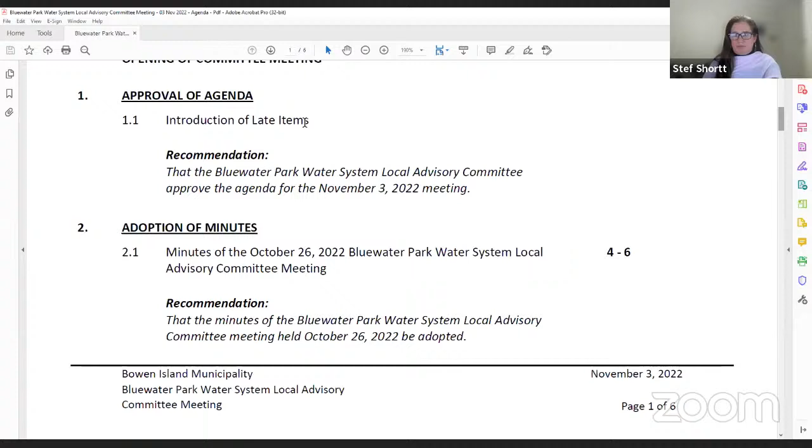So just want to thank everyone that's participated so far. The journey is not ending with tonight, it's just beginning on next steps as well too. So thank you everyone for being part of tonight. So first point, approval of agenda. You did touch on introduction of late items. Stef, anything in regard to that? I don't have specific late items. I just suspect things will be a bit more free flow than indicated on this agenda.

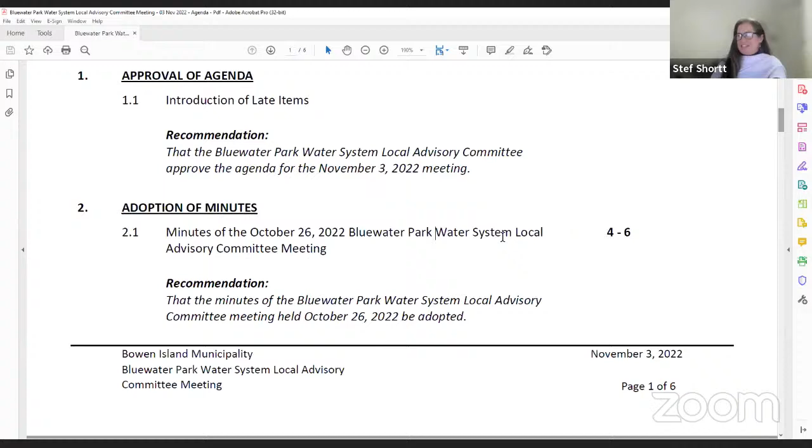So I think at this point with the public comments, we'll switch it up a little bit. The LAC has presented a whole bunch of questions back to municipal staff with a lot of answers, so we're going to be reviewing those. We'll let Patrick make some comments here in the next little bit, and then we'll get into the questions we brought forward with answers, and then we can accentuate those with any further questions, because I'm presuming there'll be questions already answered that we'll review with you that may not need to be discussed a second time.

So we'll switch this up a little bit. So business arising, the next part, 4.1 business arising from the minutes. We'll hand this over to Patrick to discuss more about the water system replacement improvement plan, next steps. Patrick?

So would you like me to go through the questions that the LAC raised? We could do that, but maybe some of the questions would be the driver to clarify a little bit more in regard to some of the proposals, as the latter part of phase one, water main replacement sections that are high risk. Wouldn't mind just reviewing that a bit more on some of the sections of the piping, just as a reminder for all of us. I think that would be beneficial for any of the participants that are part of this. But we could utilize the questions LAC members posed, which you did a good job of providing answers back to, as the driver for the next 20 to 40 minutes. Let's use that to combine, and we can pull up information from the October 26th presentation as required for reference. How does that sound? Sure, okay.

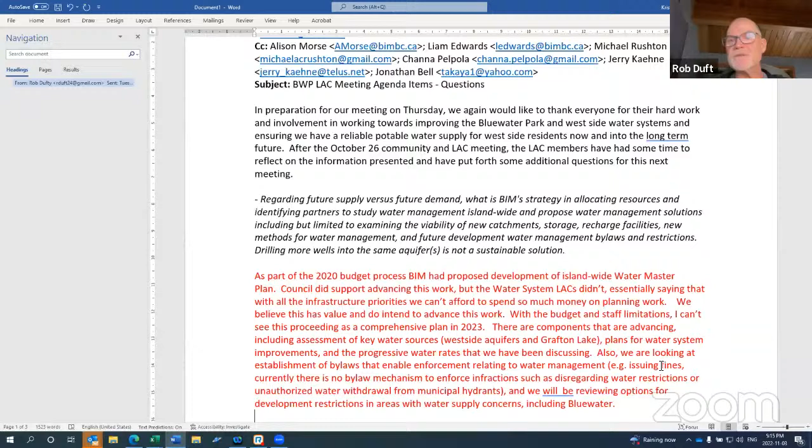So the question was regarding future supply versus future demand. What is BIM's strategy in allocating resources and identifying partners to study water management island-wide and proposed water management solutions, including but not limited to examining the viability of new catchment, storage, recharge facilities, new methods of water management, and future development of water management bylaws and restrictions.

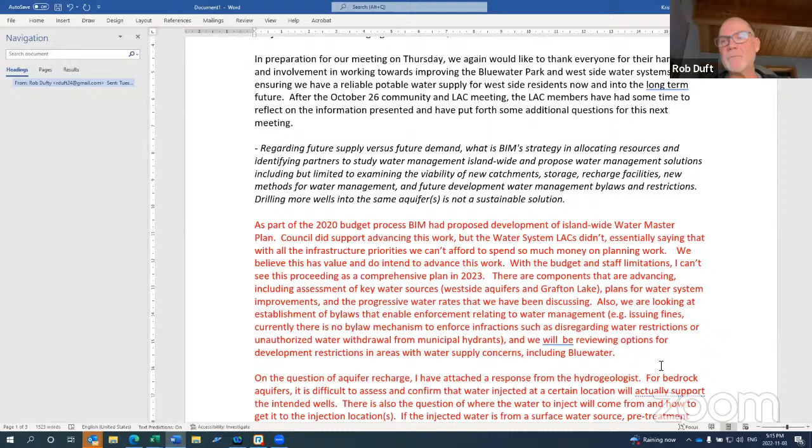In our mind, drilling more wells into the same aquifers is not a sustainable solution. We need to have a multi-pronged approach. So Patrick, you did a great job answering some questions, and there's some further clarifications.

But on the first paragraph, there was something brought up about the 2020 budget process. We all sat in the same room, kind of thing. Alice and I have had some chats about this as well, and that there was an initiative - it's kind of on hold right now - an island-wide water master plan, which was supported by council at the time, but there was concerns by the LACs.

Just a bit of clarification on that - there were some LACs that had some concerns with it because their systems are up to date. They feel they don't need to be involved with anything more. Others have some concerns, think that the plan is good on a go-forward basis, but the concern is how it would be budgeted.

Because there would be aspects of that where one being advantage to private landowners that rely on private wells or private water systems, that the information collected could be advantageous to them. So the question was posed back to the municipality: should this be looked at as more of an island-wide reserves type of way of funding this? And that's kind of the way it's sat.

So yeah, it is meshing with the larger picture. It's just how we get there and how those initiatives from an island-wide point of view are budgeted out into the future. Did you want to say anything more in regard to that right now, Patrick?

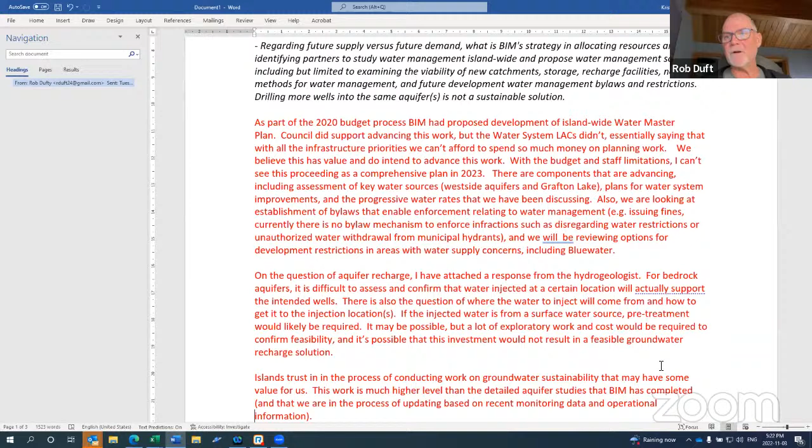Yeah, and those are all very valid and important points, from getting written down and being part of the minutes and being part of what our new mayor and councillor are seeing as the concerns that the Bluewater residents have for the west side aquifers is an important part of it. Channa, do you have anything to add further? Because you brought forward some very important and concerning points in regard to this, just to further expand on the discussions that we've had with Patrick.

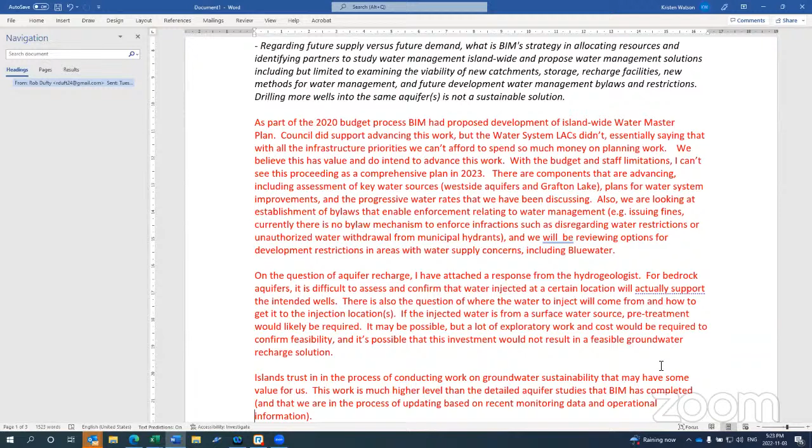No, nothing further. Thank you, Patrick, for all. As I said in the response, it was really well appreciated to see all of the thoughtful responses, because for us it's about helping respond to a whole series of community requests as well, and getting us informed with the most current and relevant information is helpful.

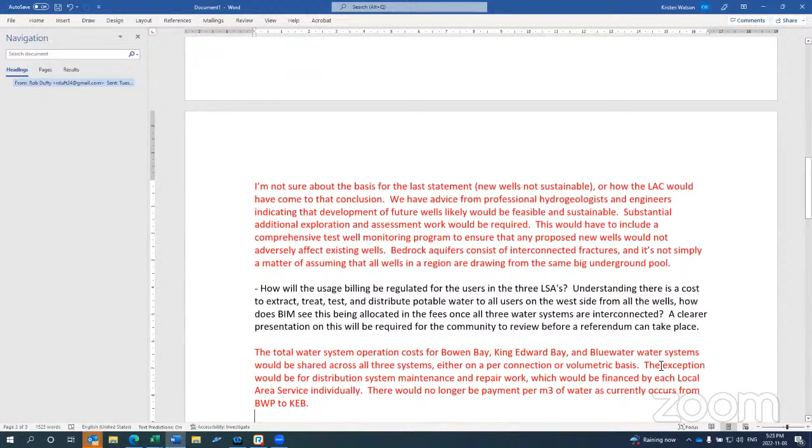I think if I may, what I'm seeing in the responses is an acknowledgement that collaboratively we need to look at some alternatives, and it's great to hear that BIM is eager to consider some of these alternatives and investigate in a pragmatic manner. So that's just my reflections from all of this back and forth, and again, appreciated.

And I echo that, and other LAC members echo that as well, as not wanting to take it off the table, always keeping minds open on what we can do potentially differently as different technologies come up to us in years ahead as we continue down this journey of existing infrastructure upgrades, and ensuring that the water supply is going to be there not just for us over the next 10 or 15 years, but for decades to come for others that buy into and want to live in the West Side community. So yeah, thank you for that, Patrick.

And I guess I would also add that monitoring the aquifer is something that's going to be ongoing, right? We've looked at it. There was a comprehensive study in 2020, 2021. We're actually updating that, reviewing the key conclusions from that based on more recent data and operational experience. And that's going to be ongoing.

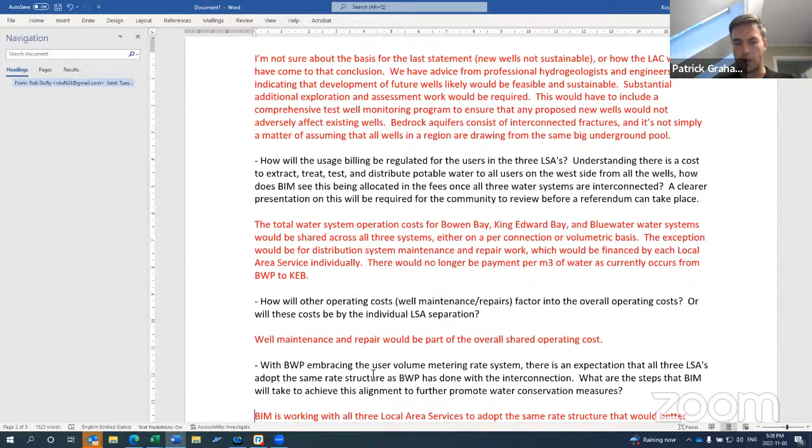If we have all of the King Edward Bay and Bowen Bay wells pumping into the King Edward Bay Reservoir and supplying all of the systems, then it would make sense that those operation costs are shared. Whether it's done on a per connection or volumetric basis is a detail we still have to resolve.

But Patrick, Jonathan, this is what I want to get in writing. So we've been promised — this is basically creating a West Side water system, right? That's what you're doing here. By that statement, you're creating what — so are we going to get that officially in writing? That's what you're doing? Because there's been a conflict here, because Kristen responded about the yearly charge that Bluewater pays for so-and-so costs. We're not going to be doing that anymore.

So Kristen, are you shaking your head — no, we're not going to be doing that anymore, or no, I'm wrong about saying that? No, you're not wrong. We're not going to be doing that anymore. We're going to be combining the operating costs to produce, distribute, and treat the water, and share them on a pro rata basis onto each of the systems.

Patrick mentioned there's a couple of ways we could do that. We haven't really decided on a way forward with that, but an easy way to do it is based on the number of connections per system — they get that percentage share of the total cost — or we meter the water consumed within each system.

And why doesn't the monthly fees go to that? Or not the monthly fees, the water fees that we just generally pay. We're paying $1,085 or whatever. Yeah, it is, but next year...

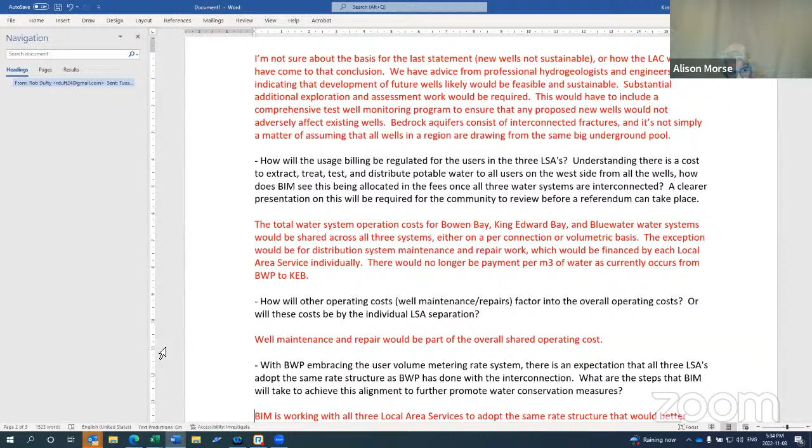Kristen, but just to clarify, the costs that will be allocated amongst all three systems will not include any repairs or maintenance to the actual water lines that are in the ground. The water lines, given the difference in age and condition, those costs will be tracked and maintained separately by the three water systems.

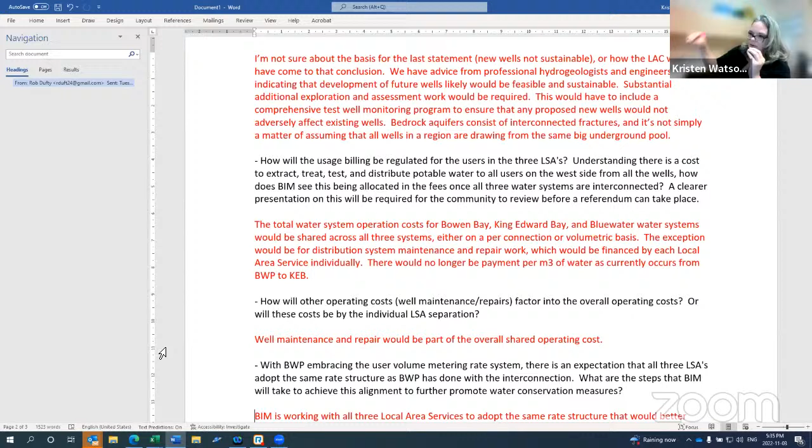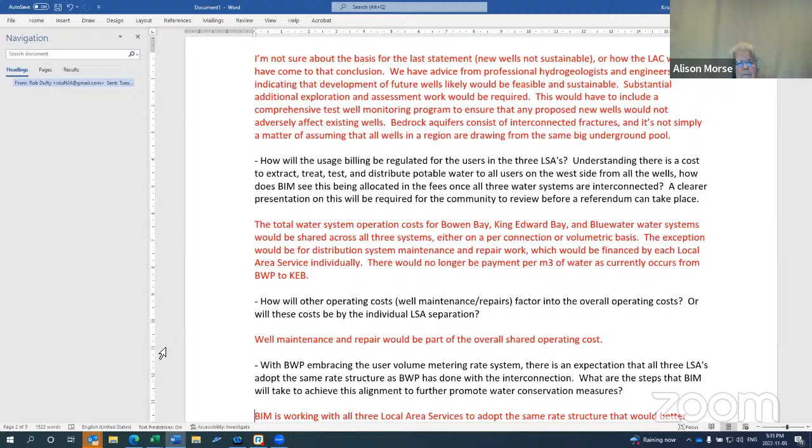And one more thing, sorry Alison - also water conservancy, is that the right word? And restrictions apply across the board? Because this year we had Bluewater at... There's a Stage 4 question coming up on that, Jonathan. Maybe you can hold it till that comes up. I can hold it, Alison. I'll hold it. Okay.

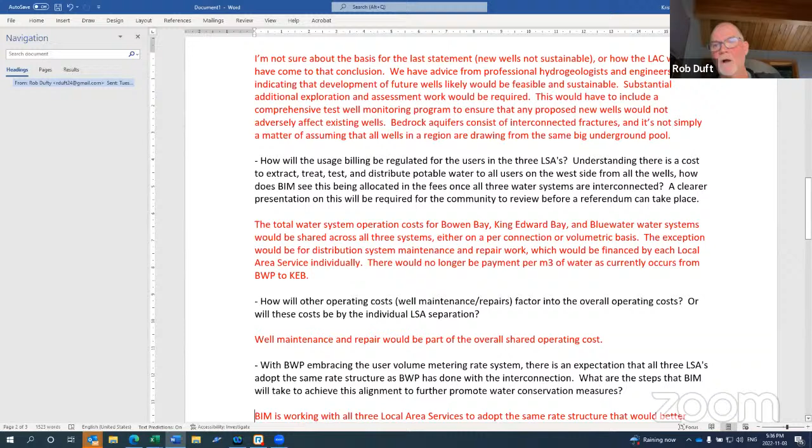And I guess the second question about well maintenance and repairs, you pretty much have answered, Patrick and Kristen - in regard, if a well in one of the three, or a pump in one of the many wells throughout the three LSAs does fail and need to be repaired, those are classified as operating costs, ongoing maintenance costs. That would be part of the operational cost that would then be divided across all three systems or LSAs.

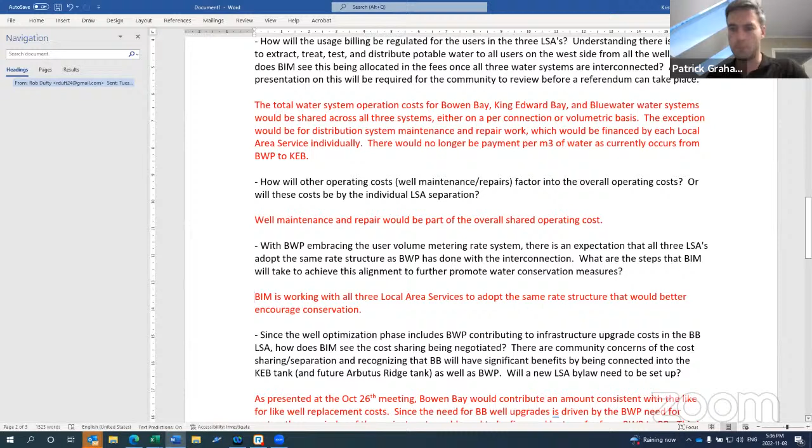I also just wanted to clarify something - when Kristen was providing her explanation, she gave the example of a reservoir in Bluewater being financed by all the systems. I don't think that would be the case. If we're building a reservoir to provide fire protection for the Bluewater service area, the King Edward Bay service area wouldn't be paying for that reservoir - they already have a reservoir. So I just wanted to clarify that wasn't probably the best example.

Well, but fair enough, Patrick. But once we do get to the level of adding additional reservoir coverage, volume coverage that is going to be interconnected - for instance, Bowen Bay's water tankage is quite low in volume, so they'd be gaining benefits from the combined system of the existing King Edward Bay tank and any new Bluewater tank that would be sized appropriately to accommodate the whole system, as well as the future Arbutus Ridge tank.

Understanding also that the Bluewater tank, any kind of upgrades in the future on that, increasing size, would also provide the additional fire flows for the community at this end of the line too. So those are definitely going to be important questions to answer with the community as well, those kind of large infrastructure upgrades.

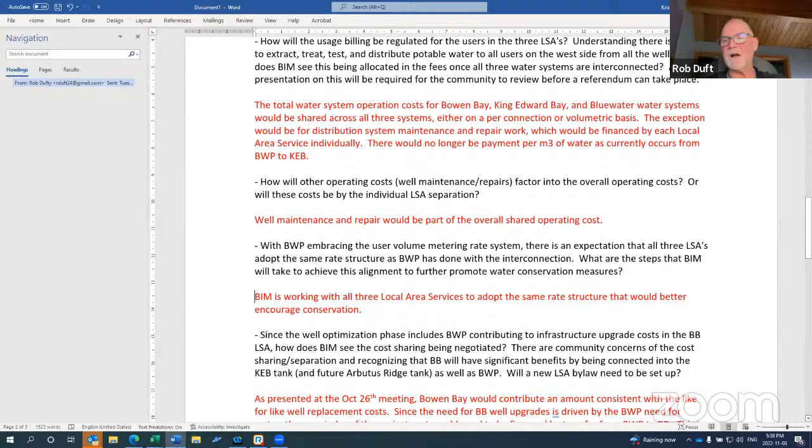Okay, next question. It's around the volume metering rate system that LAC, Bluewater Park LAC, had voted on back in July to adopt, to promote water conservation and make it more of a fair sharing of water usage type of system. And I guess the question is, will the other LSAs be looking at the same thing so that we'd have alignment? In Bluewater's mind, that alignment definitely is an important aspect of even water conservation promotion.

And it's the same rate structure that's being proposed for all three systems. But you're not quite there yet, from what I understand. So that's a work in progress. We haven't had our meeting with Bowen Bay yet, but we had our meeting with King Edward Bay, and they endorsed the same plan. Oh, good news. Good to hear. So 2 out of the 3, we're getting there.

Okay, next question, since well optimization phase includes Bluewater contributing to infrastructure upgrades and costs in the Bowen Bay LSA, how does BIM see the cost sharing being negotiated? This is more of a question around bylaws for LSAs, funding from one to the other. And of course we've had discussions in the past about how the sharing separation, also recognizing Bowen Bay will have significant benefits eventually. Not to say that we're wanting to meddle in Bowen Bay's finances of when they want to make the decision to upgrade their system to different levels.

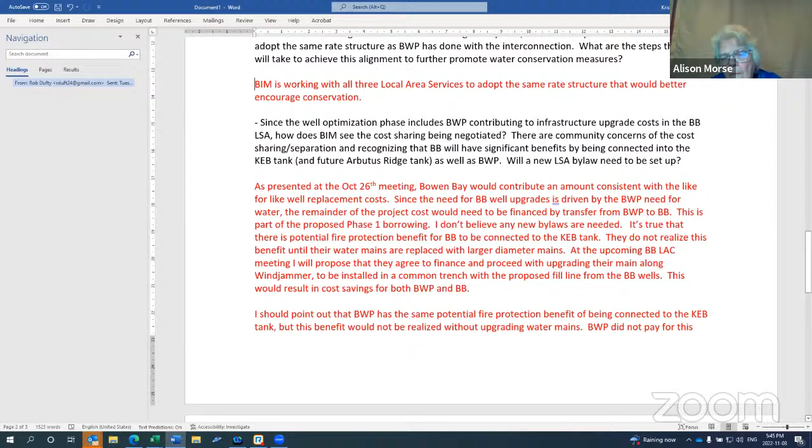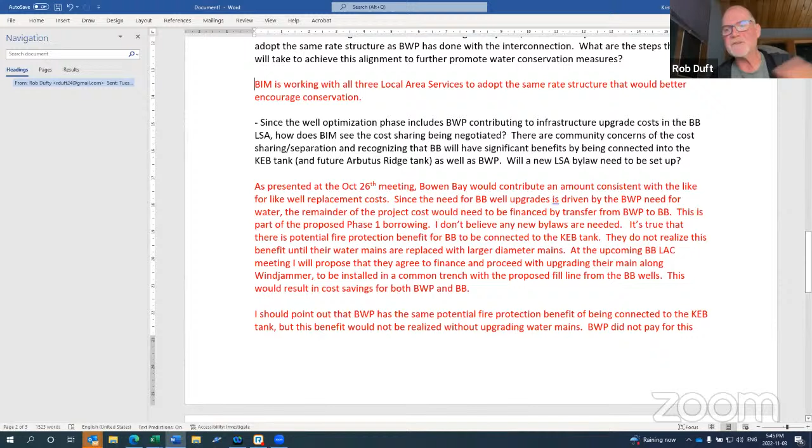The cost of putting that line in isn't in Patrick's cost for Bluewater. That's a phase down the road, even with Bowen Bay facing the decision of when they want to upgrade the rest of the lines. Then they'll have the benefit of the larger volume of King Edward Bay tank to supply the fire flow requirements. So that's a step process down the road, not meant to cloud this first phase of the well optimization. It's just a recognition there's a bigger picture here on the steps we eventually take for future upgrades, sharing the whole system with the interconnectedness. That's where we were trying to go with this statement, so it wasn't getting lost in the grass.

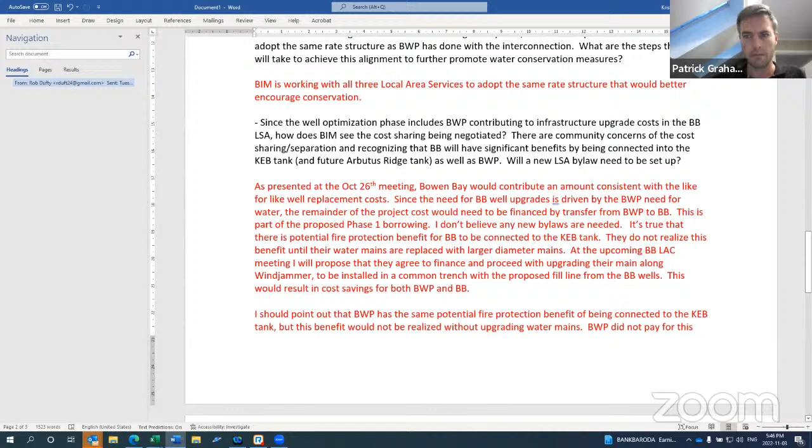Okay, can you scroll down, Kristen? Let's see. Please. Oh yeah, okay.

So I think at the end of all that, we're on the same page, that the proposed financing for the well upgrades, the way it's been proposed, does make sense to this committee. If we're going to get down to arguing about dollars, we're also realizing the direct benefit right now is going to be for Bluewater Park.

Just to put in this point from your email, Patrick, that you sent out the other day, we have zero wells in operation in Bluewater, so we're now at 100% reliance on the water coming out of the King Edward Bay tank. So we need to look at getting that well fixed as part of this well optimization, replacing it with something more optimized to accentuate the whole system. There's no argument with that, at least from myself and other LAC members. We recognize this is an important next step for us to get to a more reliable, potable drinking water system so that we're not hitting these stage 4s.

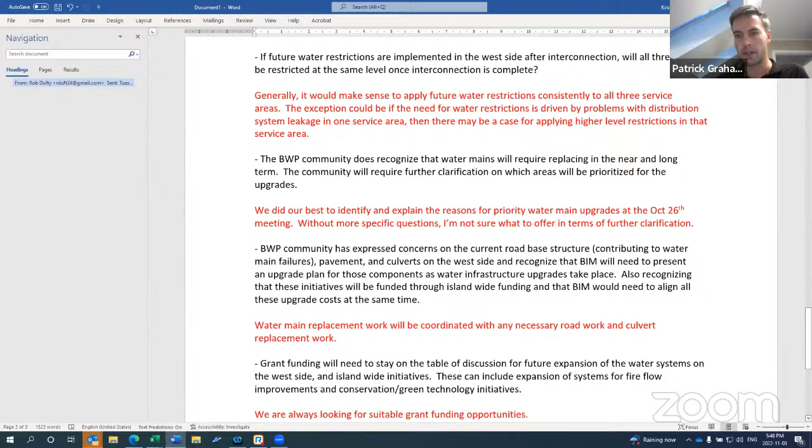I think this is the question you brought up again, Jonathan, about future water restrictions implemented in the west side. Patrick, you did provide an answer on how that would be handled. Generally, it would make sense that if all three service areas are supplied from the same sources, water restrictions would be consistent. I added the caveat that if there's a situation with substantial leakage in one service area causing problems for the others, there might be a case for applying higher level restrictions in that area. Yeah, to me that makes sense.

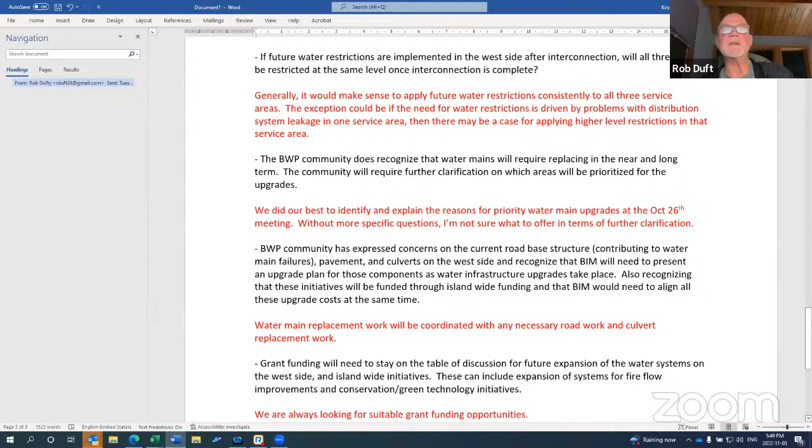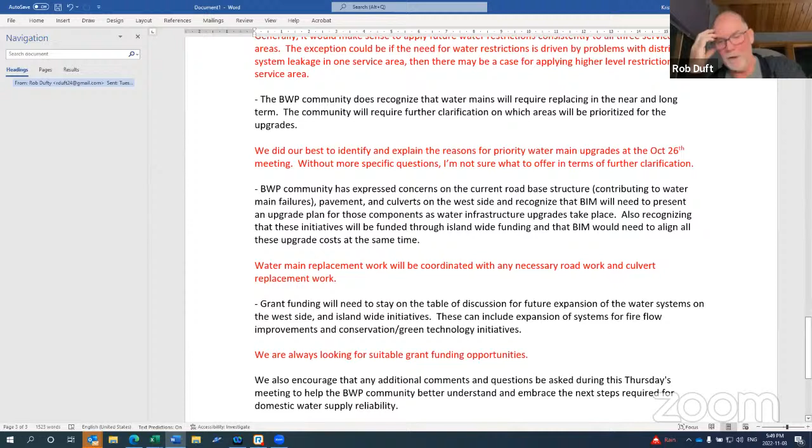Bluewater Park community does recognize the water mains will be required to be replaced in the near and long term. The community will require further clarification on which areas to prioritize. I know you did a presentation at the October 26th meeting, and you zeroed in on a couple of sections, so maybe just remind us and talk about those sections briefly.

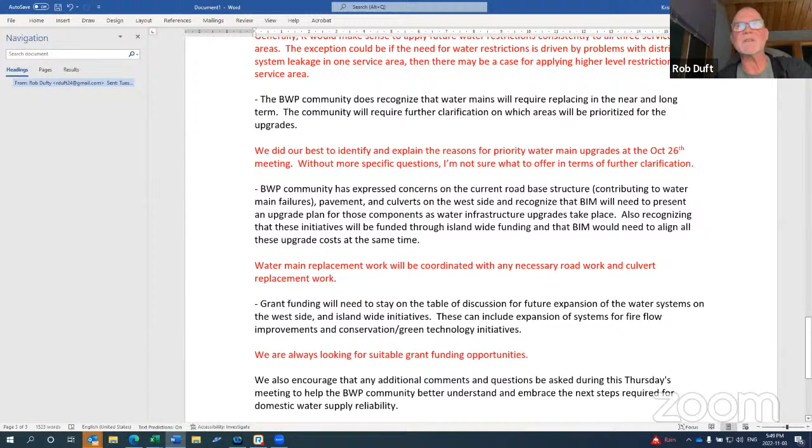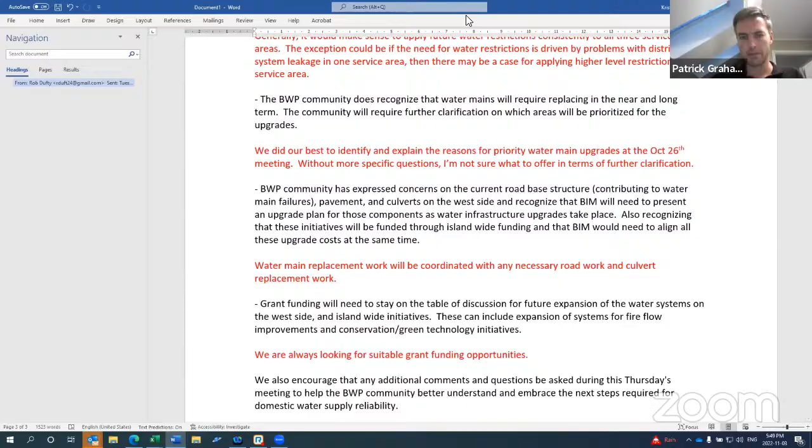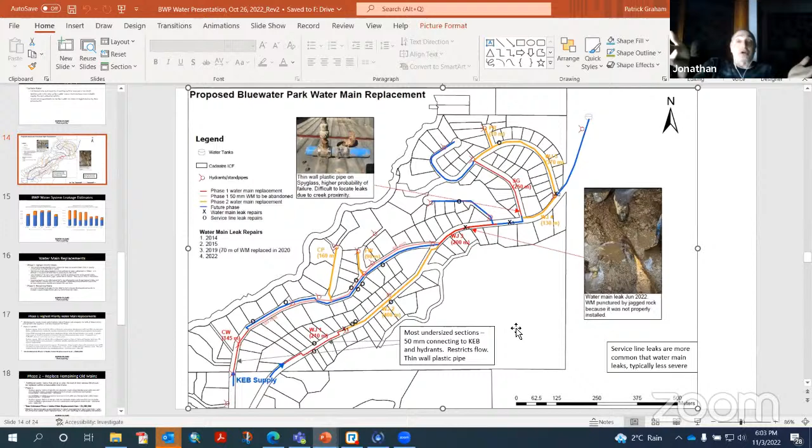There's more than just the stratas involved in the King Edward Bay service area. There's private individual lots that aren't part of the strata as well. I was thinking about the strata itself, like the roadway and everything is private. I just didn't know how that worked.

If it's a water service line on a strata road, then that's essentially strata infrastructure. For it to be municipal infrastructure, it has to be on municipal property, or an easement created for it.

So if there's a leak within any strata property, I'm not picking on King Edward Bay, then they're responsible for fixing it if it's a strata property. I think there are some stratas or private roads within Bluewater that has come up in past discussions with Liam on how those could be handled as well.

I think this Isle View is a strata line. It is, that's where I live. Yeah, so that's why I was asking. I think there's a bit of a connection that goes up Schooner Lane, and then in past minutes over the decades, even Mutiny Lane going up to the water tank, and currently there's no provincial license for that equipment up there too that needs to be looked at.

So yeah, there's still a lot of things that need to be worked through, wrinkles on the remaining part of the system that's going to take some time to solve.

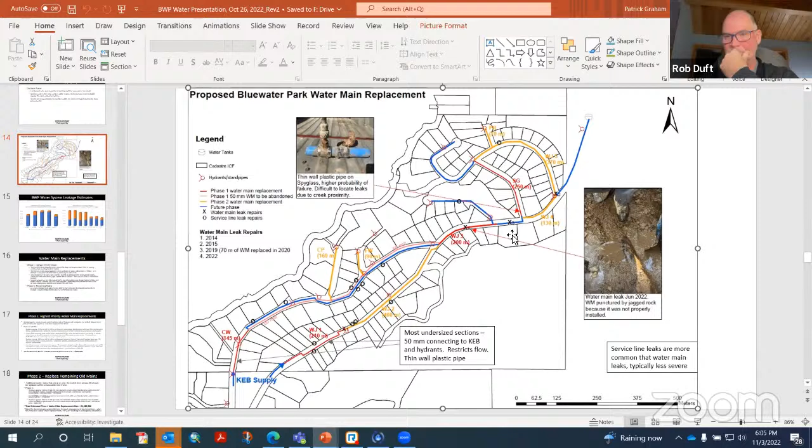Okay, couple of last questions here. Bluewater expressed some concern about current road-based structure and what happens, and I know Liam made a comment about cut and cover. But funding for major paving of roads has got to come from different reserves, and there's not a big pot of money with the municipality to do those kinds of things. But there's an expectation that even Bluewater, being kind of the forgotten community, is finally looked at from a let's make things better out here too.

So that's on there as being recognized as a takeaway in the minutes too, Patrick. Yeah, I don't know about Bluewater being a forgotten community. There's a lot of road on the island. Oh yeah, recognize that. So there's a lot of road per capita in Bowen.

Certainly we would strive to do better than what's happened in the past in terms of integrating infrastructure work, road work, and utility work. Whether it makes sense to redo a whole road versus just repaving the waterline trench portion of the road would depend on the condition of the road.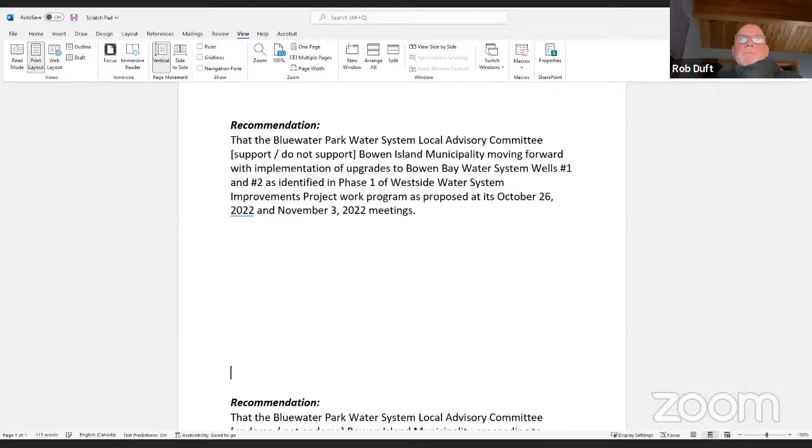Thank you. Now, I think this has to adjust a little bit, Patrick. I was looking at it today, and it's pretty generalized right now, but those are the steps. But you did send out a late item yesterday regarding the Bluewater number 3 well has failed, and you'd like to advance the optimization replacement of that well from phase 2 to phase 1, which is going to change a little bit of the cost structure you're proposing here, as well as some of the wording in the recommendations.

Yes, since the October 26th meeting, Bluewater well number 3 has failed, and we haven't gotten to the bottom of why yet. We'll have somebody investigating that next week. It's the one Bluewater well that was recommended by the hydrogeologists and Urban Systems to be upgraded for optimal performance. It's the well with the best recharge characteristics in the Bluewater well field.

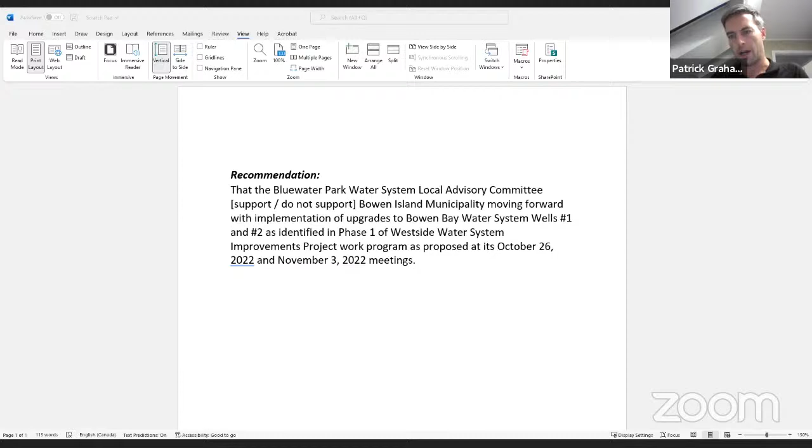So we had included that in phase 2 of the proposed project. The only reason for that was essentially that it contributes less water than the Bowen Bay well upgrades, where the bulk of it comes from. In an effort to keep the amount of money needed to be borrowed down, it was proposed that maybe we could do that later. In light of what's recently happened, it would make more sense to include it as part of phase 1.

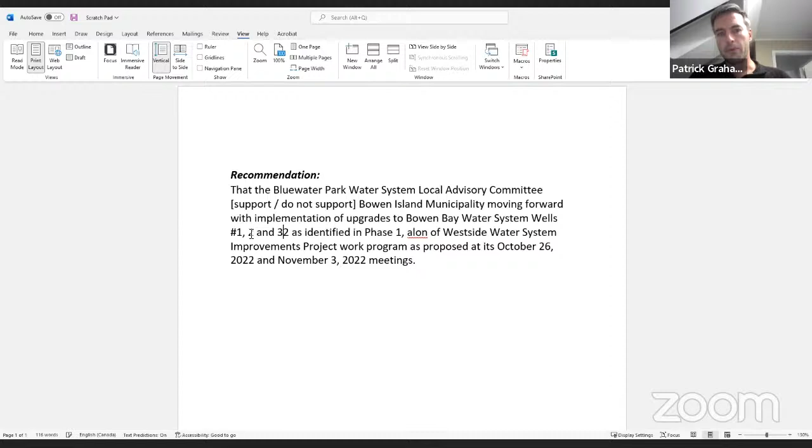And what we're proposing as phase 1 is to upgrade all of the Bowen Bay wells, 1, 2, and 3, and also Bluewater well number 3. So that'll change the wording of that slightly, Steph.

Other LAC members, any comments regarding that switch-up with well number 3 moving forward? Well, that's fine, I guess there's some sense there, but with Patrick going on about the other wells, we're getting into a little scope creep, I guess, right? Like, why don't we do this, why don't we do that? And again, a lot of this is coming down to money, right? It's a huge chunk of change we're talking about here. So sometimes things do make sense, but...

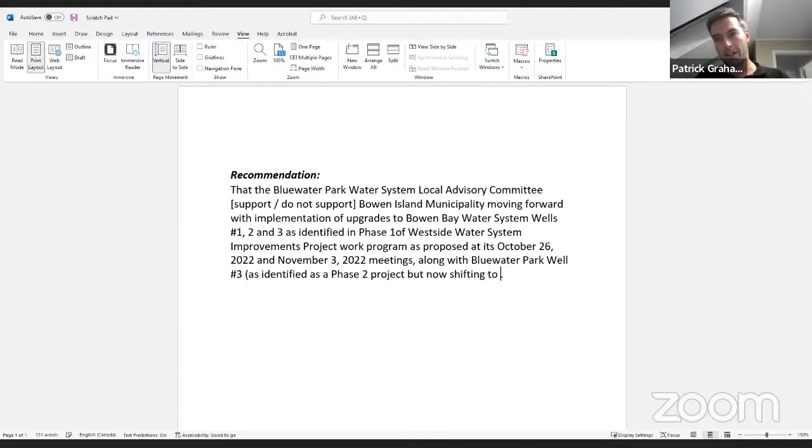So, I guess what was proposed as phase 1 on October 26th totaled about 1.56 million, and that was recommended as phase 1 borrowing. We'd be increasing that to 1.64. So yes, but that was for well 3. You said that was if we add Bluewater well 3 to the phase 1 scope. Okay, so yes, it is.

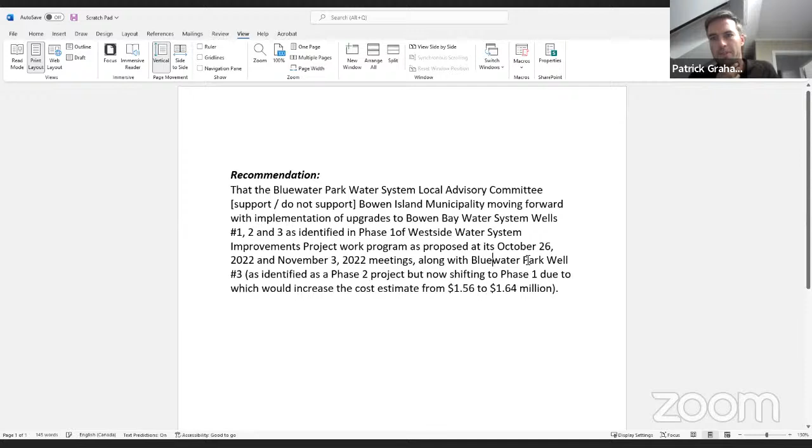But we're not... what I thought you were mentioning was about the other 2 well upgrades as well. Well, I guess what I'm trying to understand here is you've got a recommendation about moving forward with implementation of the well upgrades, but it doesn't include the recommended water main upgrades in the recommendation. There's 2 recommendations as part of the agenda, Patrick.

So the first recommendation is on the well optimization, which references what Steph has up on the screen: Bowen Bay water system wells 1 and 2, as identified in phase 1 of the Westside Water System Improvements. We're considering adding the Bluewater Park well 3 because we've got a failure. It's going to have to be pulled out, looked at, and that gives us an opportunity to then deal with that at the same time from an optimization standpoint.

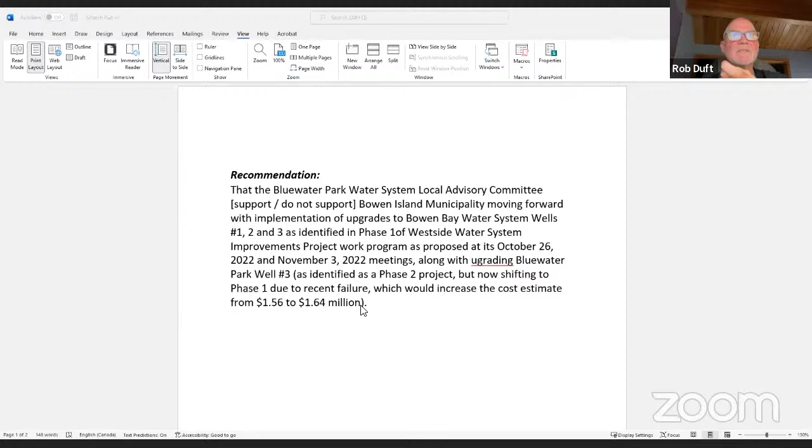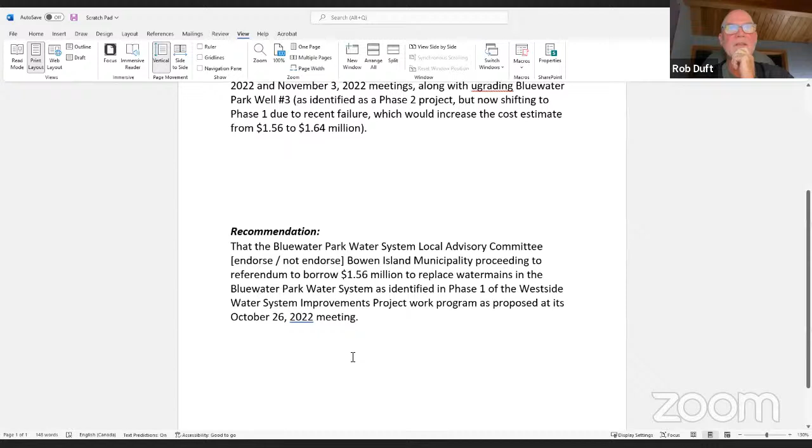And I get the synergies of doing that. The second recommendation talks about the borrowing for the overall phase, which includes those sections of high risk line upgrades on that section on Windjammer, the Captain's Way, and Spyglass. And that's what the second recommendation is covering.

Right, sorry, okay, yeah, I see. Sorry, I'm confused like Patrick is. The first recommendation only talks about upgrading the Bowen Bay wells. It doesn't talk about the interconnection of the Bowen Bay wells to the line from the Bowen Bay wells to the King Edward Bay tank. So you've got to do that too. So that needs to be in the recommendation.

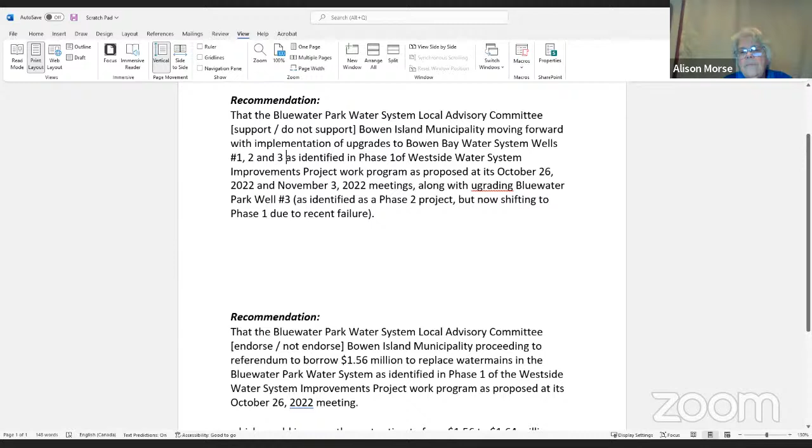In that first recommendation, yeah, so: Bluewater Park System supports BIM moving forward with the implementation of upgrades to Bowen Bay water system wells 1, 2, and 3, and the supply line from the Bowen Bay wells to the King Edward Bay tank. Is that the right wording, Patrick?

So I think the second recommendation was about all of phase one, and the first one was pulled out just because of the urgency of the Bowen Bay well. So you wanted to get that well. Is that right, Patrick? Well, the way it's worded, it doesn't talk about all of phase one, it's very specific.

So do you want to add one in now? Do you want another recommendation after that - that the Bowen Bay or the BWP supports proceeding with the referendum to borrow, because you don't have to upgrade... do you have to upgrade wells 2 and all 3 pumps in all 3 wells, Patrick, at Bowen Bay?

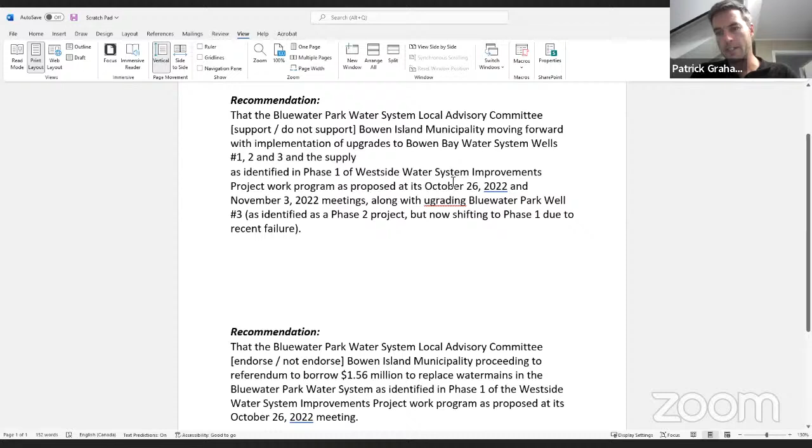Well, that's what's recommended. I guess the difference is that one recommendation relates to endorsing the whole phase one program, which is going to require a referendum with the community, due to the urgency of the supply issues and the need to deal with the wells that have failed, Bowen Bay well number 1 and Bluewater well number 3. What we are hoping to do is advance the design component of the well upgrades immediately prior to going through the whole referendum process. So that's probably why the separation.

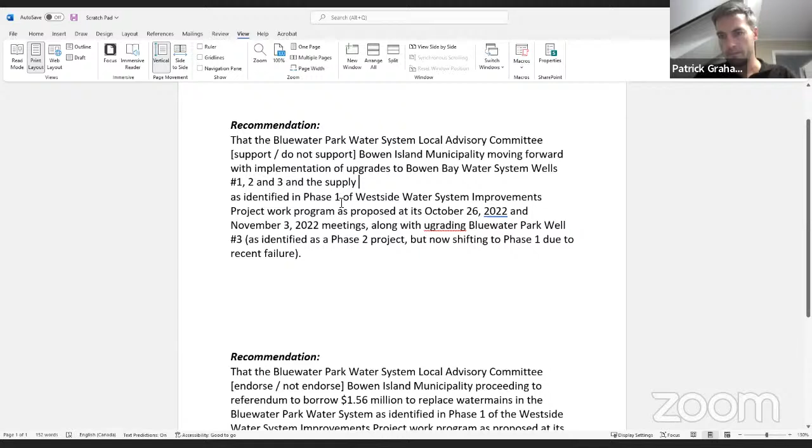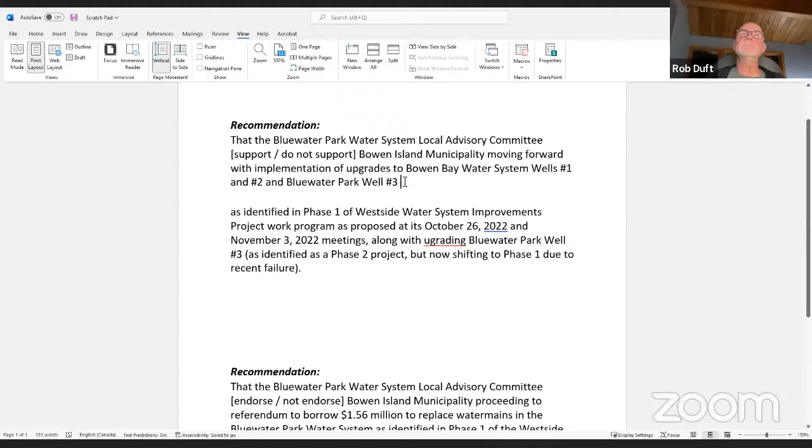So just putting my accounting hat on here: the upgrades to the Bowen Bay wells 1, 2, and 3, the new pumps - how much is that going to cost? There's about 580,000 to 600,000 in the project for the well connection system. So that includes upgrading the pumps and the line - the flow line, correct. So how much is the upgrading of the pumps themselves?

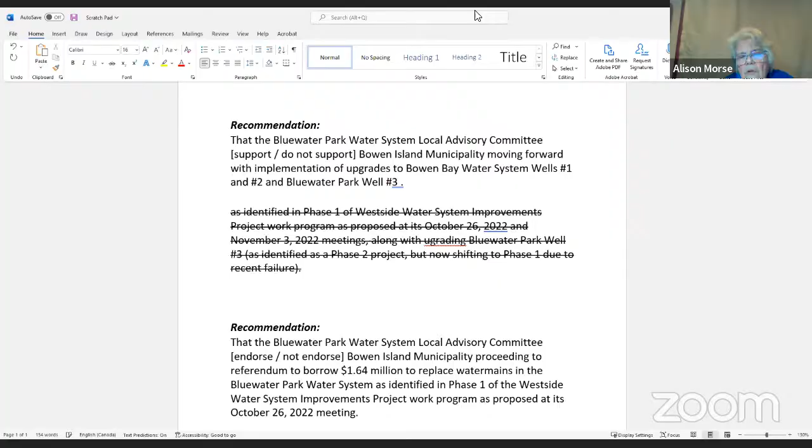Well, why don't I just go back to the presentation. I guess I'm thinking there's only about $70,000 to $80,000 in the reserve fund for Bluewater Park. So is that enough money to pay for upgrading the 3 wells and the supply line, or just upgrading the 3 wells? It's enough to advance the project - to go get the pumps, to get somebody to come out and pull the pumps, to get the design for the electrical upgrades that are needed, and potentially order some materials with long lead time - essentially to advance the project within the capacity of the existing reserve funds.

So is there a risk to the Bowen Bay wells of having an oversized pump if it's just for pumping into Bowen Bay reservoirs? No, I don't think so. We would definitely confirm that, but my understanding is it wouldn't be. Because you want to do all the pump work at once.

Well, I guess what I'm getting at is that we anticipate problems next summer, and so if we look at the timeline here, we have to have our new council brought up to speed on everything, essentially endorse the referendum process. Probably the earliest that can happen is the end of November. Then we have a couple of months process to go through the referendum before funds are approved - you're getting into the spring. We would like to find a way, in order to avoid problems in the summer and increase the chances that this can actually be completed before next summer, to get working on this now.

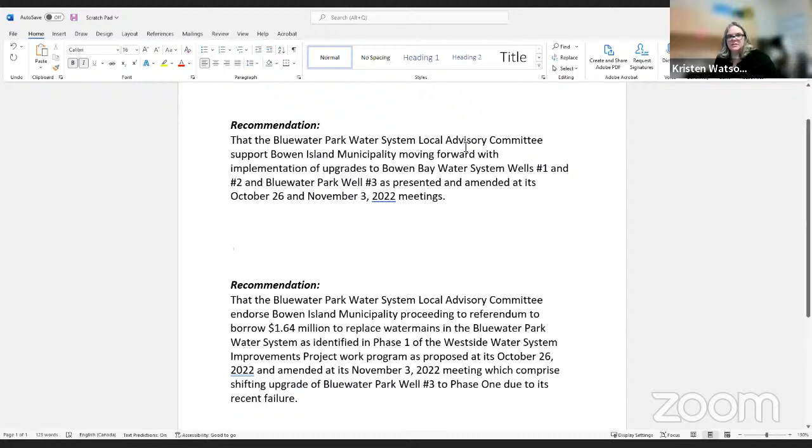Can you see those? Yeah. So it's the planning, not implementation. Yeah, because Patrick needs the planning and design to go ahead right away, to take the next steps to move forward to digging dirt next year.

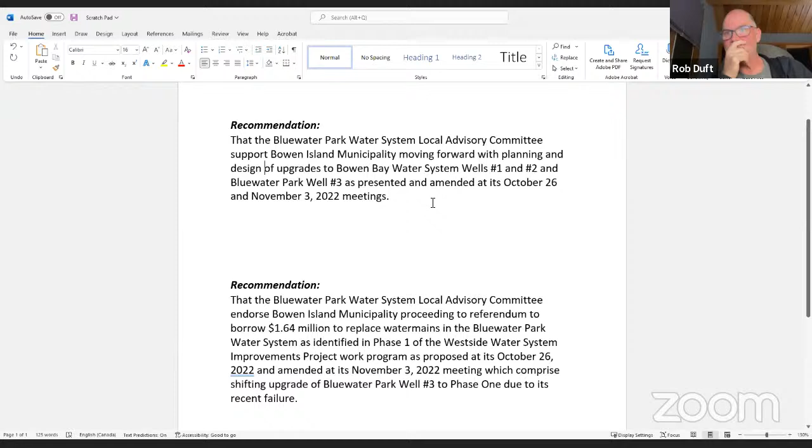So you probably just need to say as presented at the November 3rd meeting.

That design work, that's going to include the Bluewater well as well, Patrick? We're amending that recommendation to include the Bluewater well as well. Okay, yeah, which to me makes sense to do.

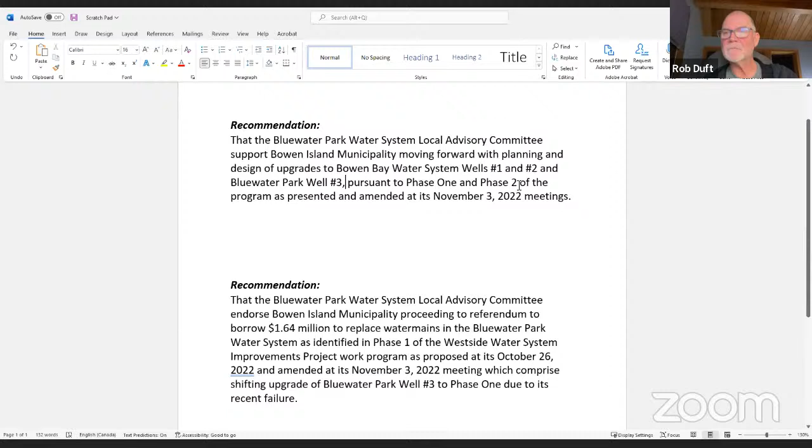I'm not sure that anything was... maybe it was. Pardon, Alison? Do we need a number in there? A number of wells? No, or a dollar cost figure. I don't know, I'm just thinking.

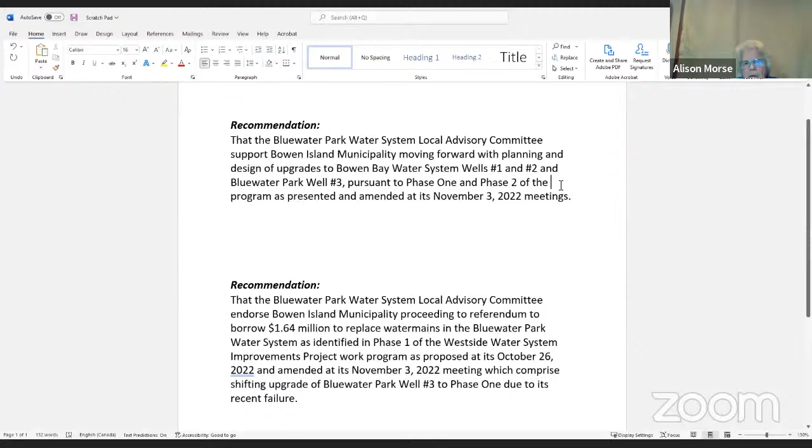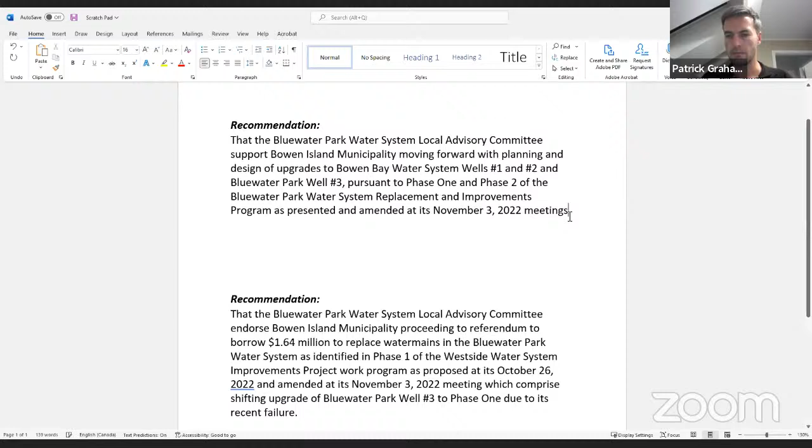I don't have an amended fee proposal that includes the Bluewater well, but we could provide it. It would probably be in the 40,000 range. Is that on top of the cost for Bowen Bay or inclusive? All inclusive, yeah, the design work costs would be in that range.

So where it was is you were talking 22 to 30,000 during the October 26th meeting. Now we've factored in additional analysis and bringing forward the Bluewater well number 3 into it, so that's adding on about a $10,000 upfront design to get it figured out at this stage. Essentially, yes.

So are we gonna say up to 40 or up to 50, Patrick? If you put 'up to' in front of it, Stef, it sort of makes sense, because we're not totally sure.

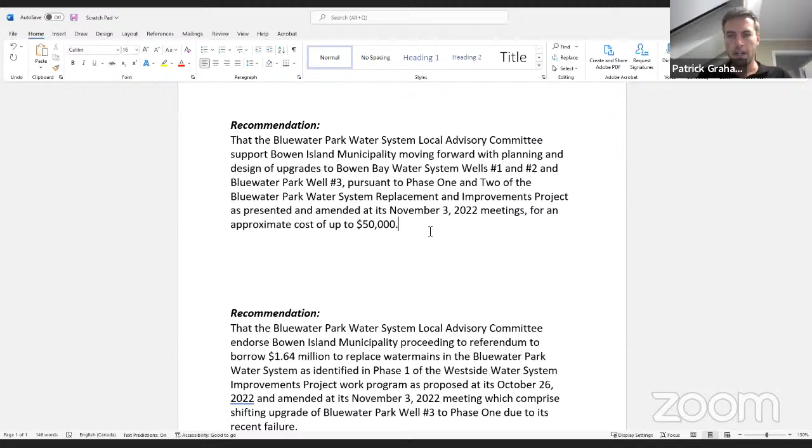And that can all be funded by the reserves, and then Bowen Bay would be paying for pulling the pump there to see what's going on with it. Correct. And I mean, they're going to want, based on what communications we've had, us to replace the pumps like for like, based on lack of certainty or assurance that right now, in this time of year, the Bowen Bay wells 1 and 2 are adequate.

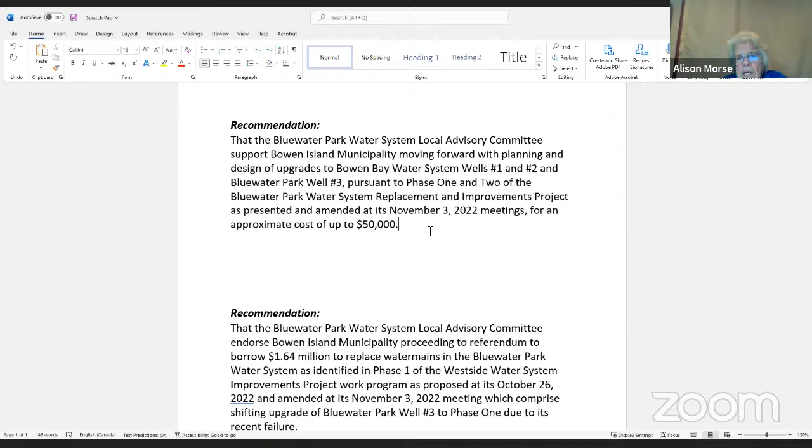When we get into summer, they won't necessarily be. But for the immediate expenditure that you need to do, you're probably gonna start before the end of the year on this part. Well, we would start immediately with this. I think if we have some assurance that we're getting going with this work right away, then that might affect how they feel about wanting to have a like for like done in the interim.

Yeah, and we've talked about that before, Patrick, that the like for like kind of scenario is based on existing infrastructure. Any LSA would cover a like for like replacement, and then anything to optimize it above and beyond would be covered by other LSA, like Bluewater, to accentuate to then expand the water over into the interconnection with King Edward Bay, correct? Yeah.

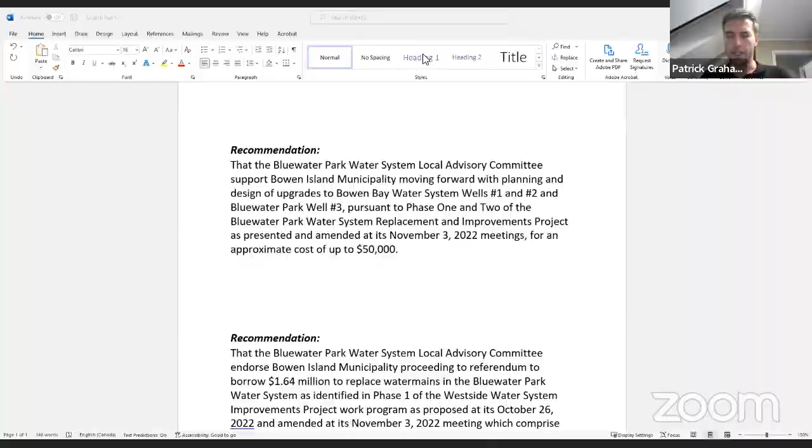So just to give you a sense, the existing well pump in Bowen Bay Well 1, which is the most productive one, is about 3 horsepower, and the proposed pump is about 15. And so the electrical upgrades are the big component of the cost there.

And there's a difference in the price of the pump too, I assume. Right, and availability, that's the other big thing. Oh, the supply chain, yes.

So the other thing that would be proposed to Bowen Bay is that they consider moving forward with upgrading their main along Windjammer. I mean, that would have to be their cost, and they would have to finance it, so they would have to agree to it. That would mean their main and the fill line, the new fill line, could be installed in a common trench, which would result in cost savings for both projects.

But I don't know how they will feel about that. And as stated before, that is a decision by Bowen Bay on their contribution for that LSA for those upgrade works too, as what we're talking about here for our own upgrade works. We can't influence what they want to do or at what time they want to do it, as we don't expect them to be trying to influence ours.

Right, okay. Did we lose you, Stef? Your screen? Oh no, I just was gonna give you guys some space to chat. I will go back on.

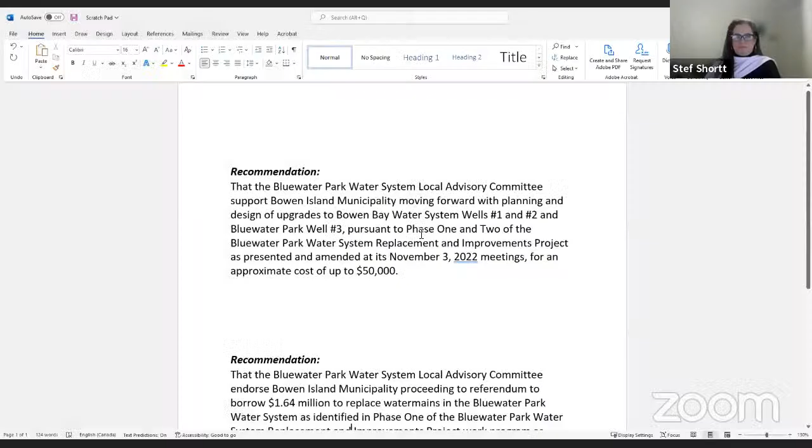Can you see it now? Yes. Okay, so this one.

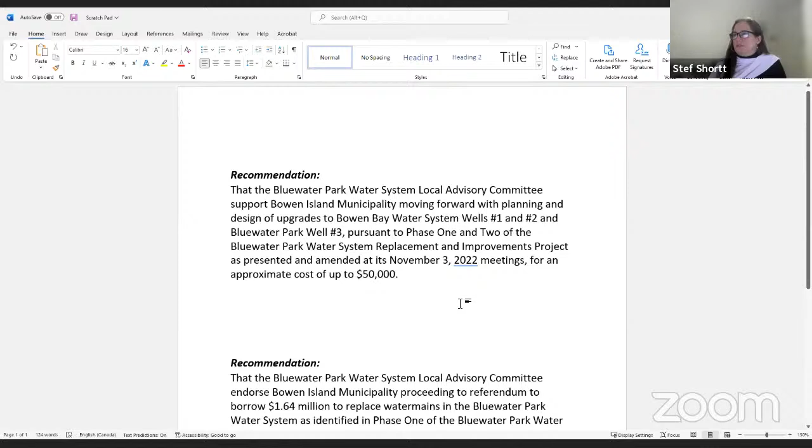So that's the Bluewater Park Water System Local Advisory Committee. That's a tongue twister. Support Bowen Island Municipality moving forward with planning and design of upgrades to Bowen Bay Water System Well Number 1, 2, Bluewater Park 3, pursuant to phase 1 and 2 of the Bluewater Water System Replacement Improvement Project, as presented and amended at its November 3rd meeting, for an approximate cost up to $50,000.

Okay. So do we need to add 'to be funded from reserves', Krista? Yeah, I think that would be a good addition. Thank you, Councillor.

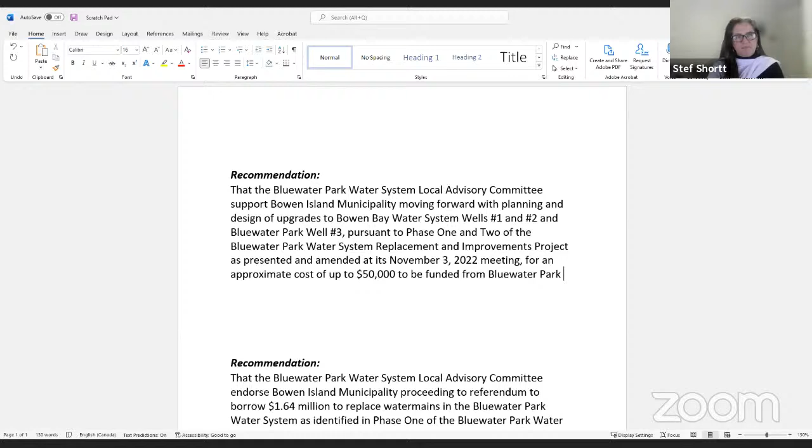Statutory reserves? Capital reserves? You can just put reserves. They have a combination of surplus and statutory, so we'll have to figure out how much to take from each.

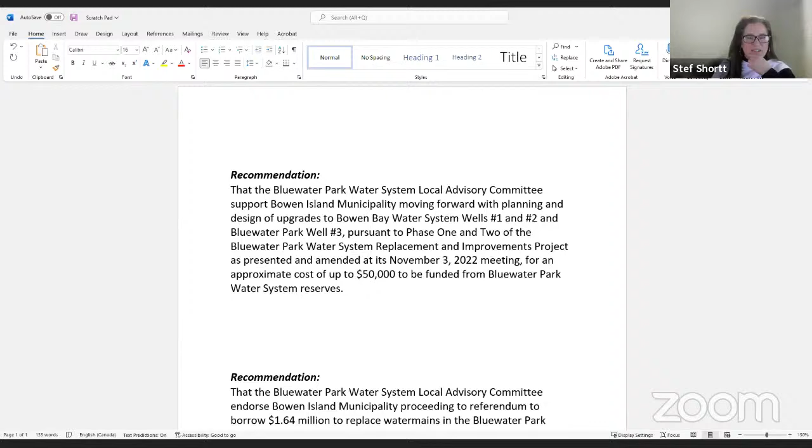You better get the bills out for payment to get the reserves replenished. I actually can't set them until council adopts the new rate bylaw. But if anybody wants to make a payment early, we're happy to take it. Gratefully accepted.

Okay, I think we've got three left. Are you gonna move that, Rob? Yes, I will move what I just said here. You want me to repeat it again? No, no.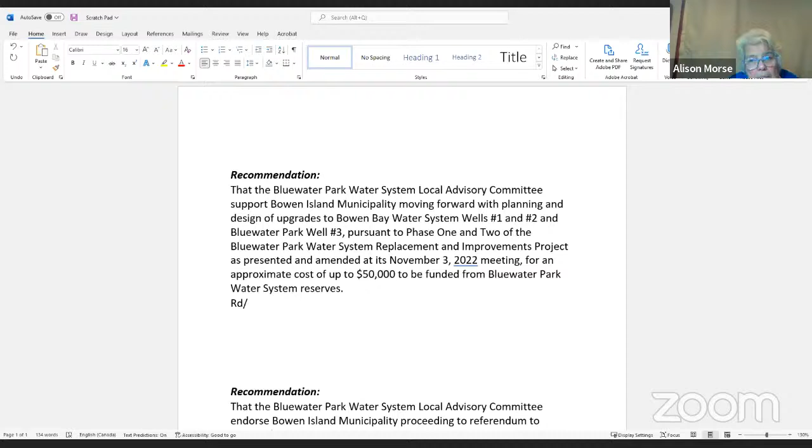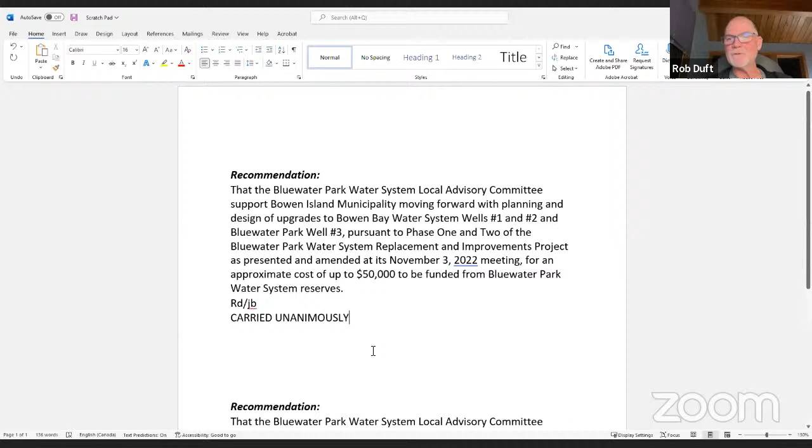Who's gonna second it? Jonathan? I'll second. All in favor? Rob's in favor, I'm in favor, Jonathan's in favor, Jerry's in favor. Chana by chat room was in favor as well. Okay, great, I've lost him. Next.

So we got that the Bluewater Park System Local Advisory Committee endorse Bowen Island Municipality proceed to referendum to borrow 1.64 million to replace water mains in the Bluewater Park water system, as identified in phase 1 of the Bluewater System Replacement and Improvement Project Works Program, as proposed at its October 26th meeting, or the November 3rd meeting.

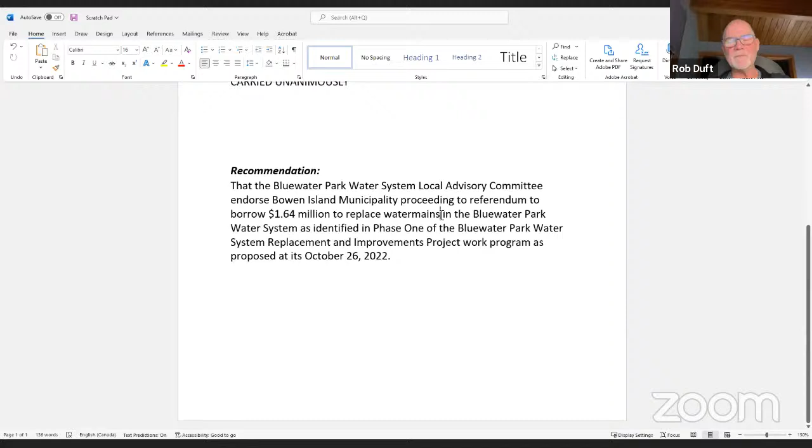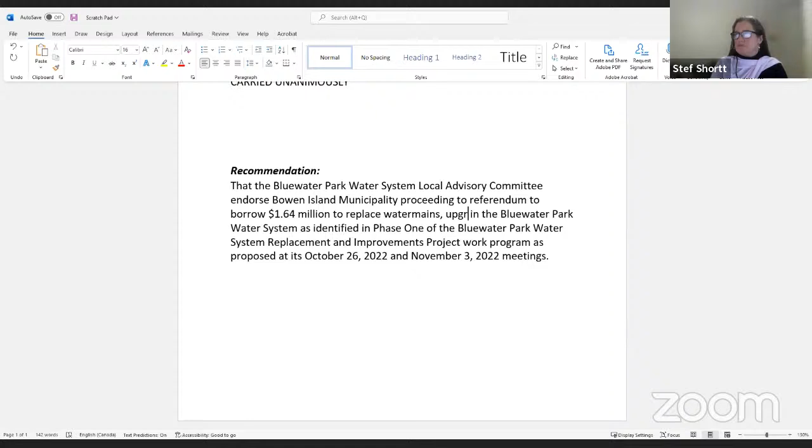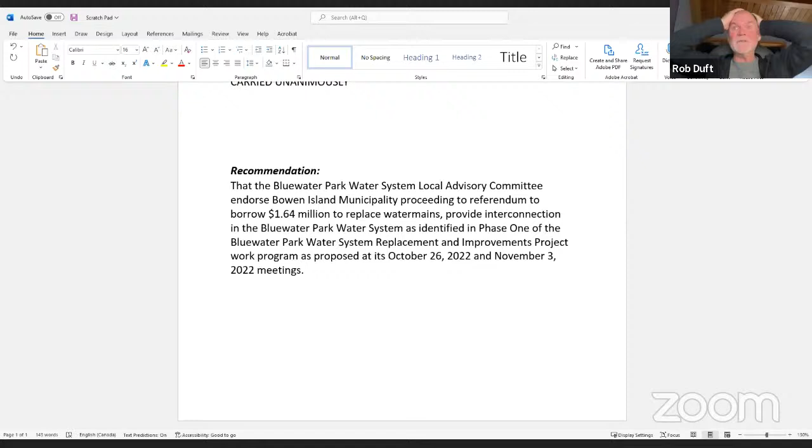So where is the approval for the interconnection lines? Isn't that all part of it? Yeah, it's part of the 1.64. I don't know why it just says replace water mains. So you need to borrow 1.64 million to upgrade the wells and provide the interconnection. Yeah, that was part of Patrick's October 26th presentation, as well as briefly hit on today. So maybe we need to reference back to the October 26th presentation. You are referencing it, but you're very specifically in the motion saying replace water mains.

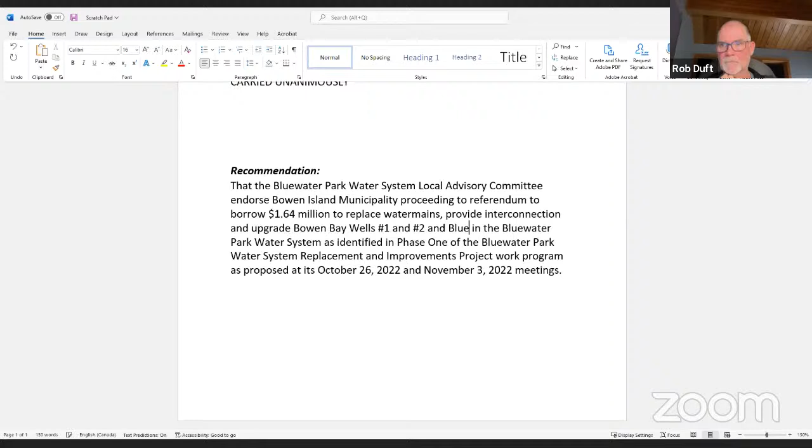I don't know why that's there. So now you're saying, and provide interconnection with Bowen Bay, and upgrade the wells too. It's all upgraded wells, pieces, and upgrade the wells. So it's Bowen Bay wells number 1 and 2, right? Yes, number 1 and number 2, and Bluewater Park. Well, it's also well number 3, right? Can I just say upgrade wells as identified? Upgrade Bowen Bay wells. Right, well it says as identified in phase 1.

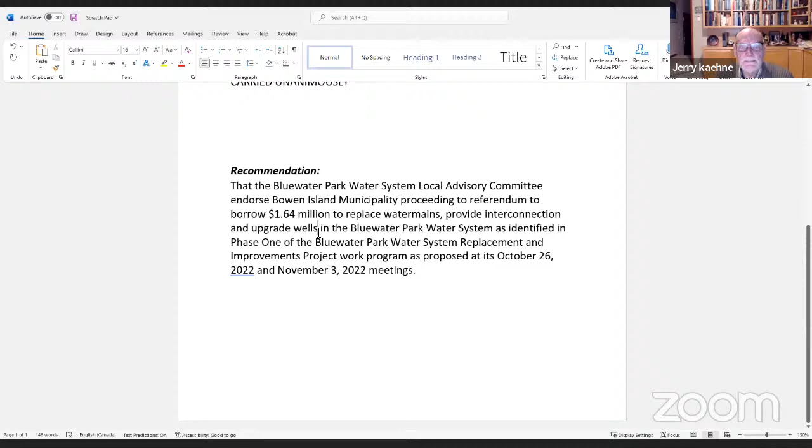Okay, but you can't just specifically say Bluewater system, you need to say both. Either delete all the references, you're right. But the Bluewater Park well is in phase 2. Actually, we've just voted to include it in phase 1. So replace water mains in Bluewater Park water system and provide interconnection lines, provide interconnection with Bowen Bay, supply line from Bowen Bay to King Edward Bay.

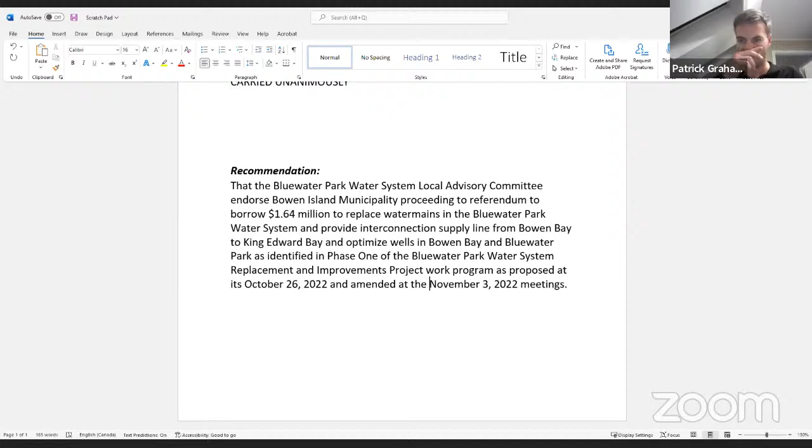And the well optimization. Now Patrick, just quickly, there's no well optimization needed on the King Edward Bay wells or Arbutus Ridge wells? We haven't recommended that. There were some recommended optimizations for the King Edward Bay wells, but the amount that it would add to the well flow is relatively small, so it may be something we consider in the future, but it wasn't proposed as part of the current program.

You know what might be helpful, Patrick, is if we could amend it, take that Bluewater Park well number 3, and take your presentation that you did in October and today, and just move that over and include it in phase 1, then the amendment would be reflected in a revised package. Or just say optimize wells in Bowen Bay and Bluewater Park.

Is the optimizing of the wells the actual new pumps and stuff like that? Yes. Putting it into layman's ease—layperson's ease, what am I doing—I was just trying to understand what optimized wells meant.

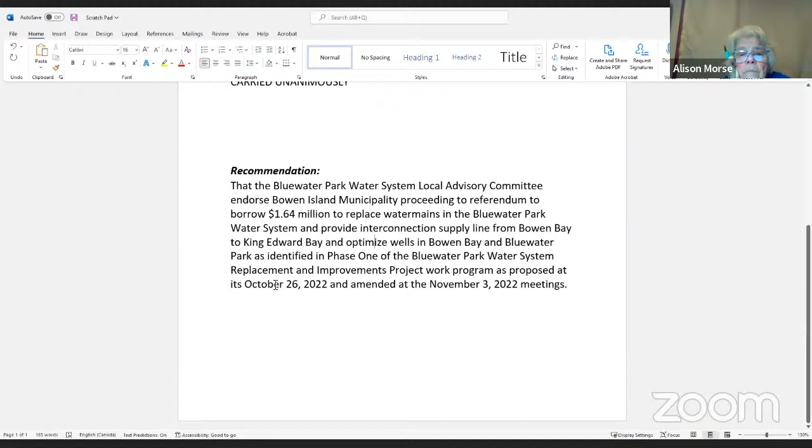Okay, so how does this sound: that the Bluewater Park Water System Local Advisory Committee endorse Bowen Island Municipality proceeding to referendum to borrow 1.64 million to replace water mains in the Bluewater Park water system, provide interconnection supply line from Bowen Bay to King Edward Bay system. What do you think?

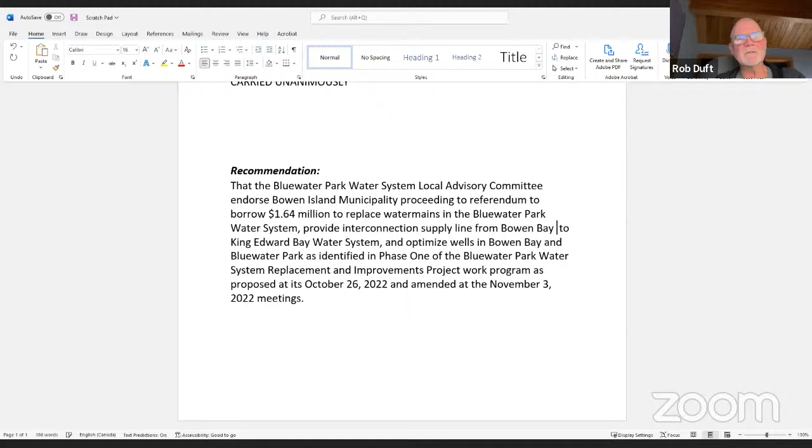Yeah, sure. It's the water tank. Is it going to the water tank or the chlorination? It would connect to an existing supply line from the chlorination shed. Which is down on Windjammer, right? Yeah, just off Windjammer.

So by just stating King Edward Bay system, that clarifies it enough, and optimize wells in Bowen Bay and Bluewater Park as identified in phase 1 of the Bluewater Park Water System Replacement Improvement Project Works Program, as proposed at its October 26, '22, and amended at the November 3rd, 2022 meetings.

Alison, what do you think? Are you gonna move that? I like how it sounds. I'm gonna move it.

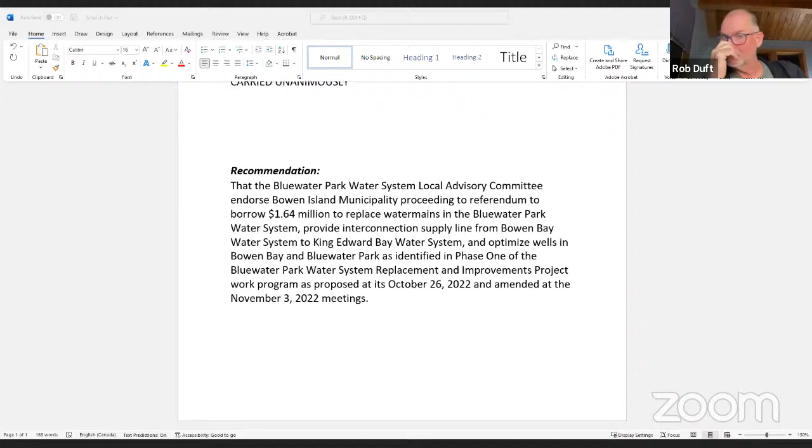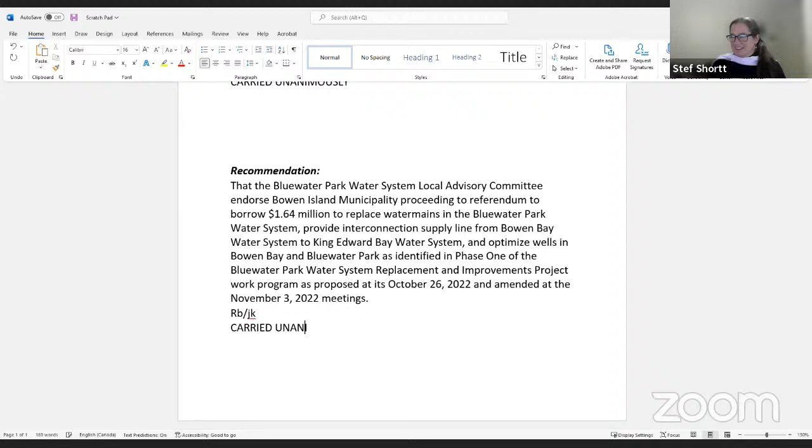Now the big job of continuing to inform the community and get them on board for everything, because there's still going to be questions to be answered that we're going to have to work hard to answer, and make the comfort level such that, fingers crossed, the referendum is going to be in favor, to finally, after years of asking for it, get some upgrades going here in Bluewater and not have to live through stage 4 anymore.

Yay, thank you, well done volunteers. It's been a lot of time, thank you for you guys, Patrick. Thank you so much. Patrick, how you feeling? Well, I'm very pleased that the Bluewater LAC has taken this step of endorsing this path forward. So, yeah, I think that's great.

Any other new meeting business? We're already 6:37, 37 minutes past. Is there any new business to bring forward? Doesn't look like it.